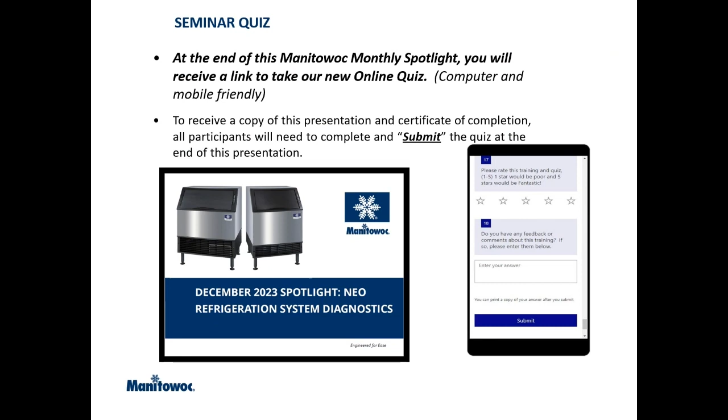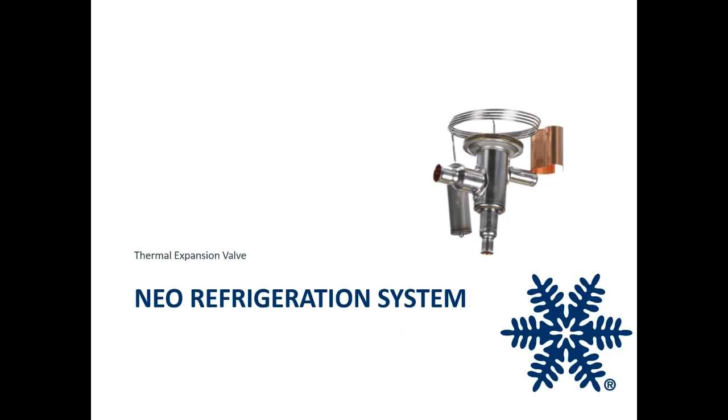So we're talking about the NEO refrigeration system here. We're going to start with the thermal expansion valve, or TXV. So we have a model here we're going to talk about. It's going to be a UDF0190A-161B. That U is calling out that this is an under-counter ice machine. That D is letting us know it's a Dice Cube evaporator.

In 2018, we started calling out the refrigerant type. That F, as in Foxtrot, is going to let you know that this is R404A refrigerant. And then the series is the 0190. That's letting us know that this ice machine could make 190 pounds of ice in a 24-hour period if it never shut down on a service limit or never shut down on a full bin. Should one of those two things happen, however long the unit is off, that's going to be lost production. So we won't get to that 190 pounds at that point.

But then we have the letter A as an alpha. That's letting us know that this is an air-cooled condensing option. Then we got the -161. That tells us that this is a 115 volt, 60 hertz, single phase unit. And the B is as in Bravo. That's letting us know that this ice machine shipped with a cord that had a plug on it.

But let's go ahead and start talking about how to diagnose a starving or flooding TXV. You're going to need a few things to do this. You're going to need to know suction and discharge pressure, status of the bulb for the expansion valve, compressor discharge line temperature, the temperature to the inlet of the harvest valve, and the evaporator inlet and outlet temperature. So we're going to start with suction and discharge pressure.

All right, here we have on the left 8 psi on our suction gauge there, that blue gauge. That's pretty low for freeze. And then on the right, we've got 50 psi on the red discharge gauge. Everyone at Manitowoc Ice in the technical service department, whether it's the technical service associates and territory service managers taking your tech support phone calls, or us here in training and development, will tell you that those are not good freeze pressures. Even in harvest, those pressures don't make any sense.

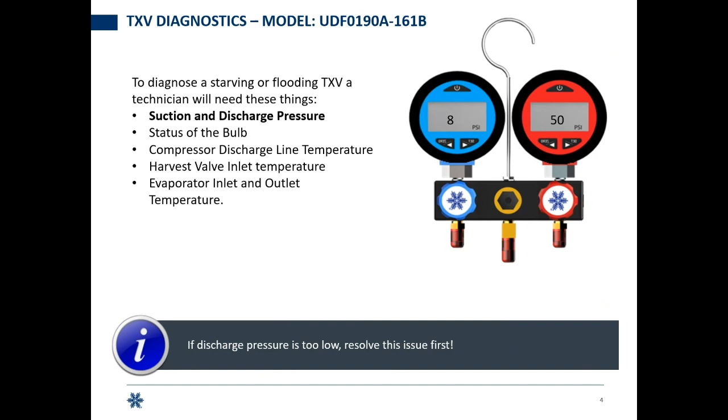But okay, so we fixed our charge issue, and now we're going further. We've got 273 psi on our high side. That makes a lot more sense in accordance with the technician's handbook. And we still have 8 pounds of suction, 8 psi. That's really low. So at this point, we know there's something going on with the refrigeration system, but we know it's not low on charge.

So at this point, we're really going to want to start diving into what else we need to figure out here. So we want to check that TXV bulb. We're going to want to know what's going on with the compressor discharge line temperature. The inlet side of the hot gas valve, that should be cool enough to hold on to.

It should not be anywhere near the heat that we're supposed to be building up on the discharge line. For those of you who don't know, 150 degrees or more at the end of a freeze cycle is what we consider normal for the compressor discharge line. We're building up heat on purpose. We need that heat. Harvesting ice is hard and it takes heat. And we need the inlet and outlet temperature of the evaporator to see what's going on.

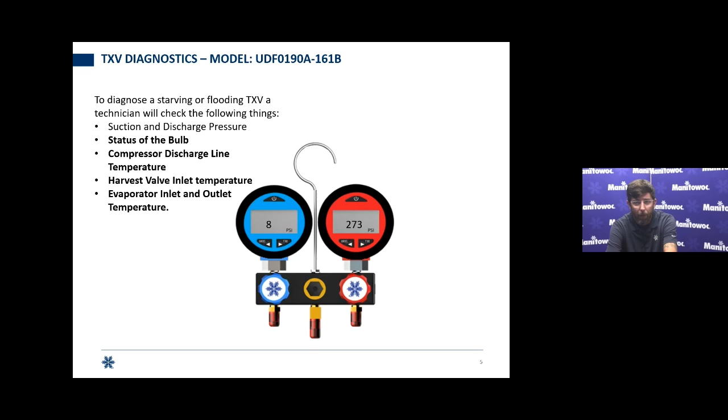But for this example, our discharge line temperature is going to be 190, and this is 6 minutes into freeze that we checked, all right? That's pretty hot. I did say 150 is normal, but early in freeze, I would not expect 190 degrees. But the inlet of our hot gas valve, we grab onto it, it's fine. You can leave your hand there all day, no issues whatsoever. So we don't have an indication of that leaking by. If that was leaking by, which we'll talk about in further slides, it would be just as hot as the discharge line.

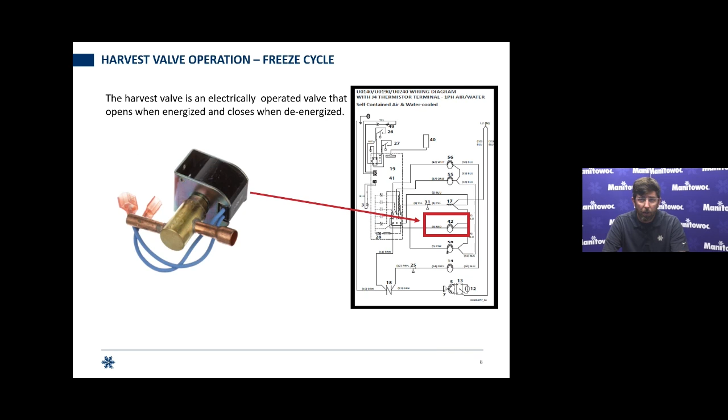All right, but what about the harvest valve? Just talked about a TXV starving. Now we're going to talk about how to diagnose a harvest valve. So the way the valve works is during freeze, it's supposed to be de-energized. So you should have 0 volts across it when you're in freeze. And it's supposed to be energized in harvest. On our wiring diagram there on the right, it's going to be component 42. And you'd be able to see in your technician's handbook when you look at the electrical there, every one of those numbers will have a label saying, hey, 42 is the hot gas valve, letting you know what you're looking for.

All right, but to diagnose a leaking harvest valve, you're going to need 4 things. 5 things, really. Suction and discharge pressure, compressor discharge line temperature, evaporator inlet and outlet temperature, and your harvest valve inlet temperature. And we're going to want to verify power to the valve. For refrigeration purposes, it's 4 things, but overall, we want to verify power, so it's going to be a 5th thing.

All right, so we're looking. Ooh, 168 on the high side and 93 on the low side. Well, if I open up my technician's handbook to page 226 for this series of ice machine, those pressures look like they do in harvest. So, hey, if you need to verify the charge is your issue, I would not stop you from doing that whatsoever. But for this example, we're not going to pull the charge again.

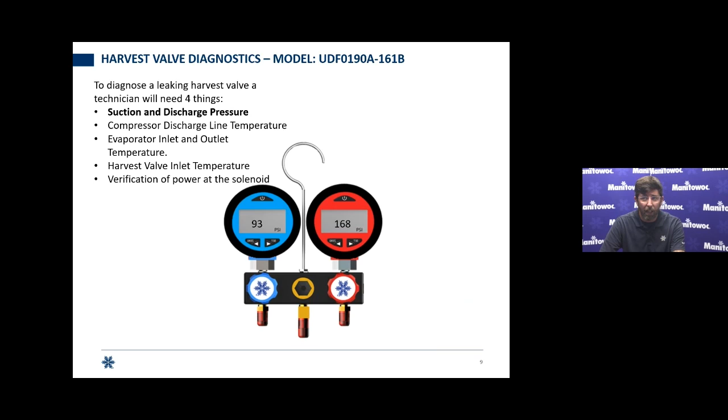We've already done it on a previous machine. So we're going to see what else is going on with this ice machine. Again, page 226 on the current revision of the Neo Technician's Handbook for a U0190A series ice machine. Regardless of voltage, regardless of cube type, it would be on page 226 of the current Technician's Handbook.

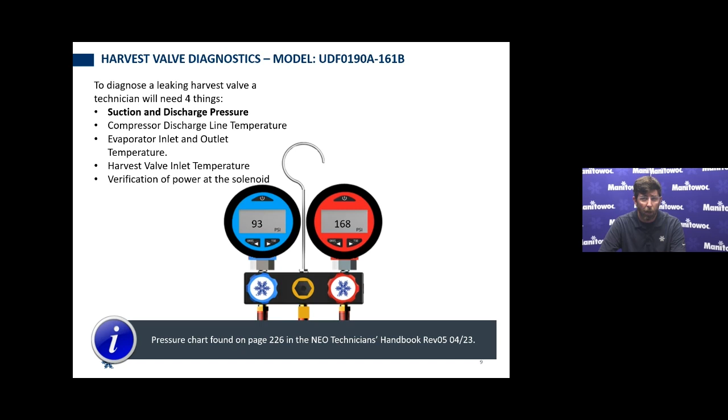Well, in this case, we're talking about a valve that might be wide open. So, hey, we've got 190 degrees again on the discharge line, but the inlet side of the hot gas valve, it is too hot to handle. It's that same 190 degrees, maybe it's 188 degrees, but we have an indication that discharge gas is running through that valve. If it's running completely through that valve, the odds are your inlet and outlet temperatures are going to be very close to each other, especially if it's wide open.

You might actually see that thing steaming the water that's going over the plate, and that's one of the keys that'll let you know that you're not in harvest. You've got water going over the evaporator, especially if this has been going on for 6, 7, 8, 9 minutes. You're in freeze. Look at the lights on the board, verify that harvest light is not lit, check the status of your float lights, low level float, high level float. If they're both lit, harvest light is off, you are not in harvest, you are in freeze.

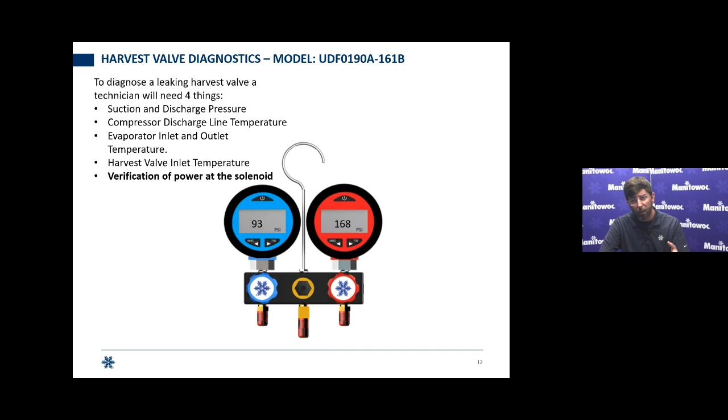You have water in the trough and you have water going over the evaporator. We're in freeze and we've got harvest type pressures. So we've got an indication that this harvest valve is leaking, but there's one more thing we want to check. We want to check for power. So again, we've got our pressures. They look like harvest pressures in accordance with page 226. So let's go and see how we verify power to this valve.

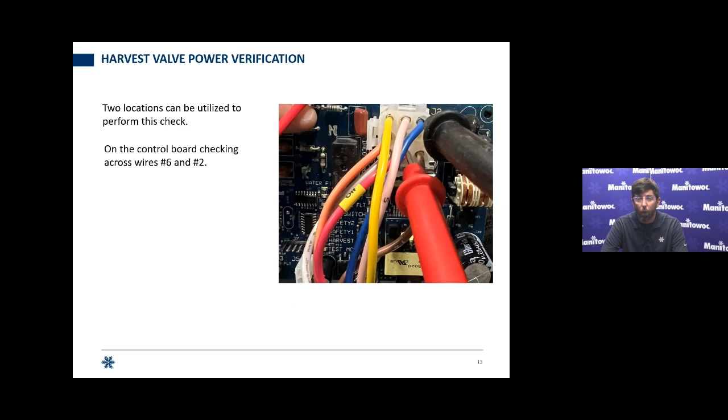Two ways you can check it. Here on that picture, you're going to see the red lead is pushed into the middle bottom wire there. That's a red wire number 6. And the black lead is pushed up in the top right there into that blue number 2 wire. So wires 2 and 6, that'll let you know, do we have power coming from the board going to the hot gas valve? Or you could go straight to the valve itself.

Go ahead and disconnect those wires from there, wire 6, and then the blue wires 8 and 7 jump to each other. Check across those. Do you have 115 volts? If you do, verify, hey, are you in harvest? Is the harvest light on the board lit? Are the float lights out? If they are, hey, we're in harvest.

If they're not and you have power, that's going to be a stuck relay on the board, but we're not really talking about board diagnostics. We're talking refrigeration system. So for this example, you don't have power at either of those two places. Or you've got ghost voltage. Hey, I saw 3.2 volts. Well, we're looking for line voltage.

On a 115 volt unit like the example machine here, I'd expect to see 115, 117; on a 208-230 volt, whatever line voltage is coming through, we'll call it 214 volts, but you don't have that here. So we are not getting power from the board to this valve, but we're heating the plate. Well, in this example, if that's what you're seeing, harvest pressures, a hot compressor, and a hot inlet to the harvest valve, that valve is leaking by.

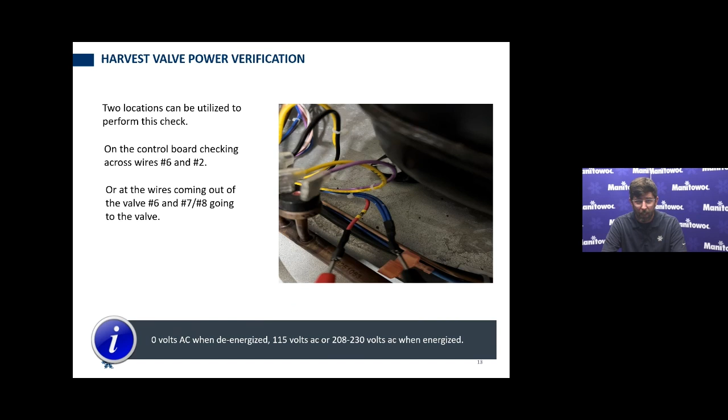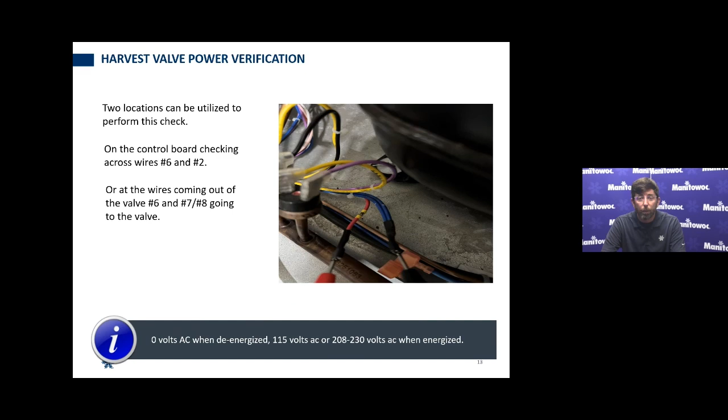Physically, mechanically. At that point, again, we're going back to the Manitowoc part house. We're getting ourselves a hot gas valve and a filter dryer. We're going to cut those out, use good refrigeration practices, and purge with nitrogen. We're going to braze in new, charge back up to the nameplate weight, and we'll be back off to the races making and harvesting ice.

All right, but what about that harvest valve in harvest? Again, as we showed you, you can verify if you have power. So go across wire 6 and 2 at the board, or go across 6 and the jumped together 7 and 8 wires during harvest to verify, are we sending power to the valve?

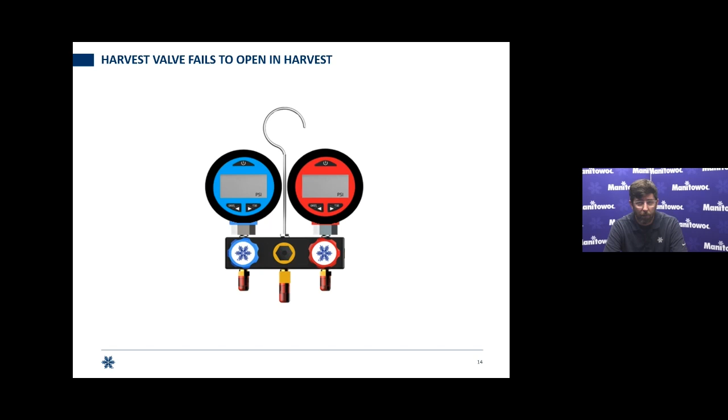Well, what are our pressures doing in harvest? Again, page 226 will tell you what's going on, but these pressures here on the screen, those are freeze pressures. Well, harvest light's lit. Water's out of the trough. You heard the valve click on, you've checked for power, you've got 118.1 volts.

We have power. On this air-cooled unit in the example, well, we're above the cutout of the fan cycle switch, and our suction isn't rising. In this case, what's happening to us is the harvest valve is failing to open in harvest. What would be happening is you would not be melting the ice, and the fan would continue to run in harvest, which is a good sign, not a telltale definitive answer. That's where the pressures come in.

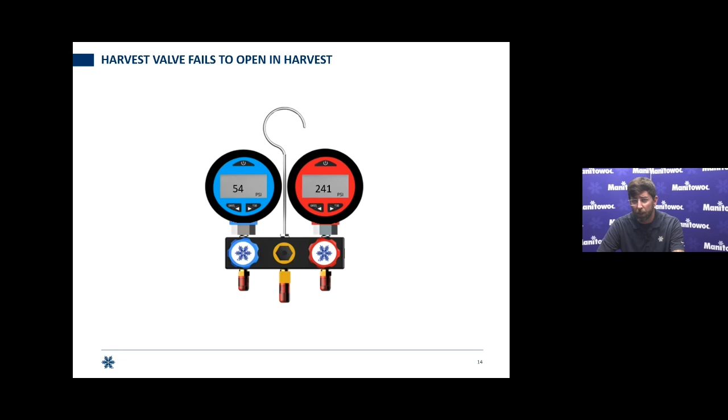But in this example, you have higher than normal head pressure, lower than normal suction pressure during your harvest sequence. That's going to be a harvest valve failure all day. Go ahead and get yourself a new harvest valve that will open during the harvest, and we're going to start harvesting ice again. Remember, though, if you see something along these lines and you're trying to verify what happens in harvest, you have to have a good freeze cycle first. Have to make a good sheet of ice, have to be able to get through those things before we diagnose a harvest.

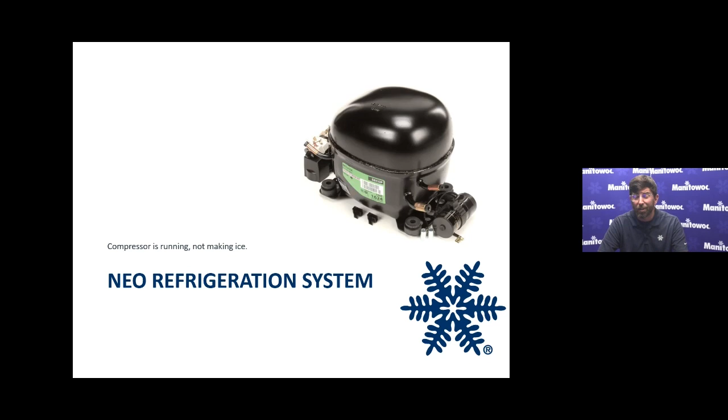All right, but what about the compressor? In this example, we're going to be talking about the compressor is running, but we're not making ice. So to diagnose a compressor, we're going to need that suction and discharge pressure again, compressor discharge line temperature. We want the inlet side of the hot gas valve just to verify that we're not misdiagnosing and chasing the wrong component, and the evaporator inlet and outlet temperatures.

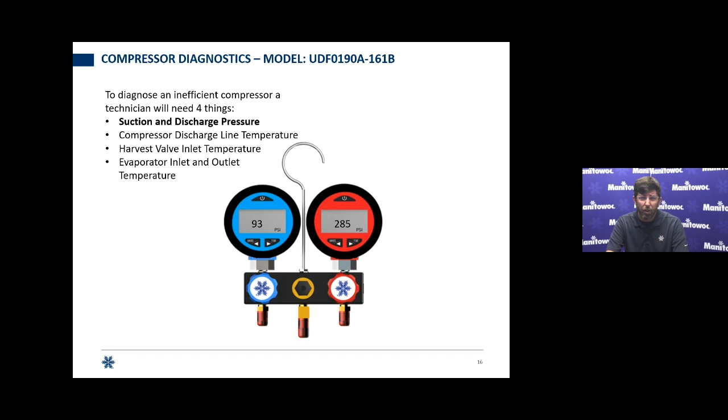All right, again, we're at our refrigeration chart, and we're going to take that same information again. So compressor discharge line, we're going to take temperature there. Hey, we just grabbed on to the harvest valve and it's cool to touch, so no indication of leaking there. And then we're going to look at what the inlet of the evaporator's doing. So for this one, we're at 196 degrees on the discharge line. So we're getting hot again.

Remember, 150 is normal at the end of a freeze. If you told me you were at 165, 170, I wouldn't be too concerned. But 196 degrees at 6 minutes, and we don't have ice, we're looking at a problem there. Well, we grab the inlet of the harvest valve, like I said, it's cool enough to touch, so we can stop trying to diagnose that. And the inlet and the outlet of the evaporator, let's call the inlet at 54 and the outlet is sitting at 57.

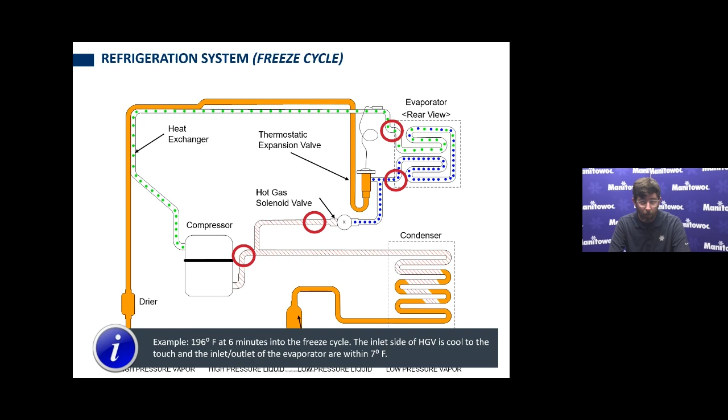They're within 7 degrees. So if you see all of this, compressor's running, you hear it buzzing, contactor's pulled in, and those temperature profiles, you have a compressor that's inefficient. It's not pumping. You need a new compressor and a new filter dryer. Replace those components, this ice machine will be back to making ice.

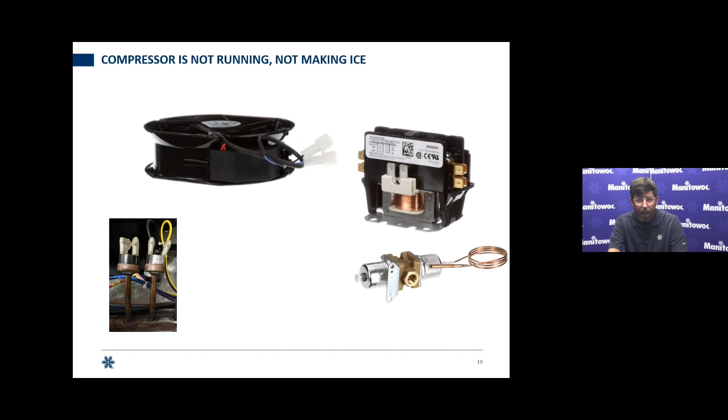And if we were talking about a water-cooled unit, which we're not really highlighting because the 190 only comes in an air-cooled option, we'd be looking at what's going on with the outlet of the condenser. Is water coming out of the condenser drain? If it is, we need to see what's going on there.

All right, so let's check, is the contactor pulled in? If the contactor's pulled in and the compressor is not running, go ahead and check your start components. But if they check out, they ohm out, they read the right microfarad readings, well, then we're looking at a compressor that won't start. Or let's say that compressor runs for a little while and then it stops. Again, let's verify, is the contactor pulled in? Yes, contactor's still pulled in. All right, we checked that, compressor stopped. Might have been hard to get an amp clamp on there, but if you've got no compressor running, power to the contactor, good starting components, they check out just fine.

You've got an open overload, you got a tripped overload, and at that point, you're going to be looking at a compressor again because that overload's internal. And if it just repeatedly trips the overload, there's something wrong with the compressor, with the internals there. You're going to need to get a new compressor, new filter dryer, and we'll be back off to making ice.

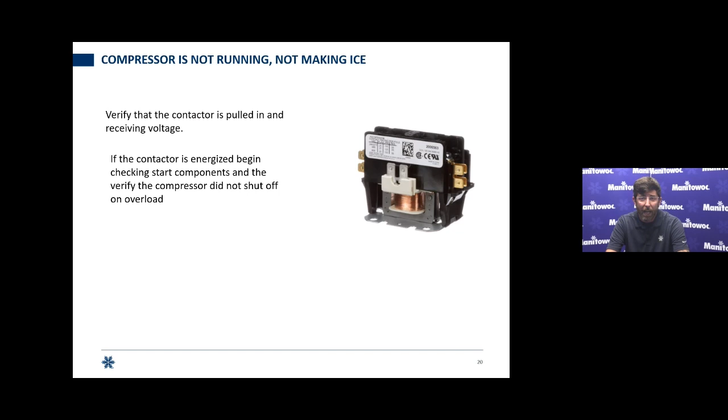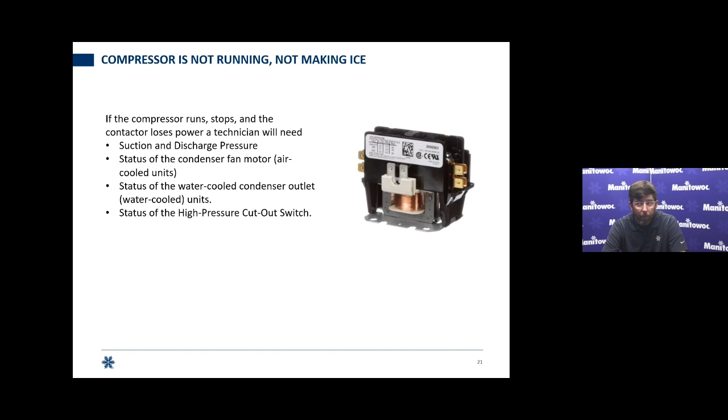But what if the compressor stops and the contactor unpulls and we're not getting voltage to the contactor? That's key. Because, hey, if the contactor just chatters or unpulls, but it's getting voltage, well, we're looking at a contactor. But what were our pressures doing before all this happened? What was the condenser fan motor doing on an air-cooled unit? Like we were saying before, what's going on with the outlet to the water-cooled condenser? Were we getting water through it? And what's the status of the high-pressure cutout? So we're going to talk about those things now.

All right, so compressor isn't running, we're not making ice, and we're talking about an air-cooled ice machine. So we've got a couple of charts up here letting you see what goes on with the fan cycle switch and what the fan should be doing when this is happening. So we were talking about a UF 190. That pressure switch closes at 250 plus or minus 5 PSI, and it cuts open at 200 PSI. Well, we're looking at a machine, we got 51 pounds of suction, and we got 445 PSI on the high side. Well, if the fan is not running, that's a big problem because the high pressure switch opens at 450, it cuts out, we're going to shut down.

Well, what's going on with the fan? If you go straight to the fan switch, if you're above the cut-in, you're above 250 like we are on the screen here, sitting at 445, I should have 0 volts and that fan should be running. If I have 0 volts and the fan's not running, the odds are the fan motor is defective and we need a new fan motor that will run when it gets power. But what happens if we're above the cut-in and we have line voltage? Well, that switch didn't close. The switch doesn't close, the fan doesn't run.

So one of the things that I'd be telling you guys to do, or anyone here at Manitowoc Ice tech support would be telling you to do, if you couldn't check there, one fast way to verify, is it the switch or is it the fan? Go ahead and pull those wires off of the fan cycle control switch, jump them to each other. Once that contactor pulls in, that fan should run constantly. We'll be sending straight power to the fan at all times because one side of that pressure switch is tied to the load side of the contactor.

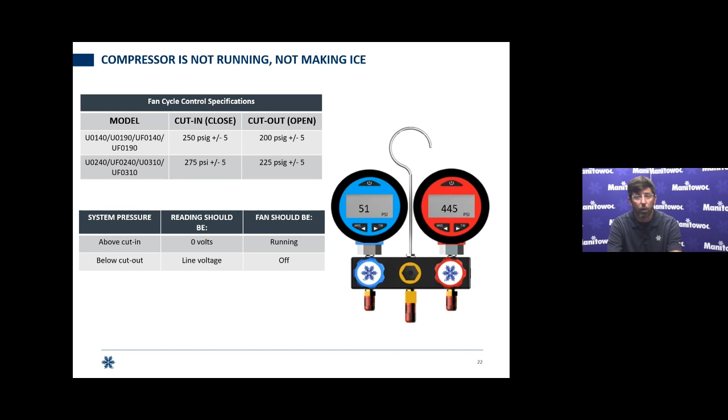So if the contactor's pulled in and we jump the wires to each other, fan should be running. If it's not, you know it's a fan motor problem. If it does, but it wasn't before you did that jump, then you know it's the fan cycle switch. Go get yourself a new fan cycle control switch, get yourself a filter dryer, cut those out and use good refrigeration practices, braze in new while purging with nitrogen, and let's get this customer back going.

But what about that high pressure switch that we're talking about? If it's defective, what if we're below that 450 PSI and we're reading line voltage? Well, hey, defective switch. Not something I see a lot, not something I think any of my coworkers see a lot. Very rarely do we diagnose high pressure switch issues on the machine. But if you had a faulty high pressure switch, you're dealing with the same issue. It's tripping when the head pressure is well below.

Now remember, if it tripped and it has not gotten below, you need to get to your technician's handbook and see where that pressure switch resets. It's an automatic resetting switch. It will reset at 300 PSI. If all of a sudden the contactor clicks in, then let's start looking at the fan again, or see what's going on with water on a water-cooled unit, the water reg valve, water supply, those kind of things.

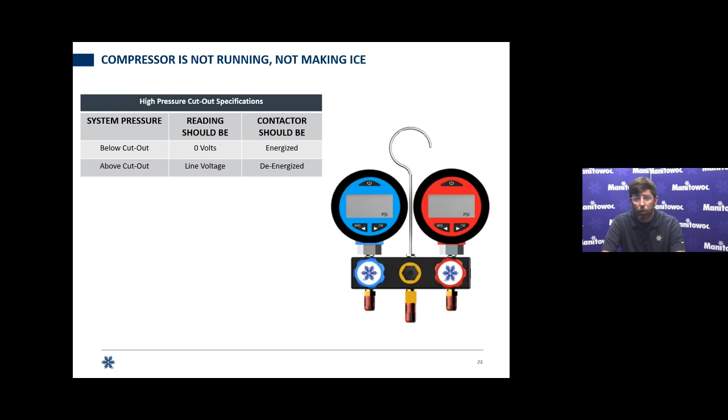But if you do have a defective switch where it's cutting open before it gets anywhere close to 450 PSI, then you're looking at an issue with that pressure switch. And similar to what we just did with the fan switch, you're going to be brazing in a new switch and a new dryer, except this time it would be the high pressure switch. Again, good refrigeration practices, purge with nitrogen, get that customer up and going, and we'll be good to go.